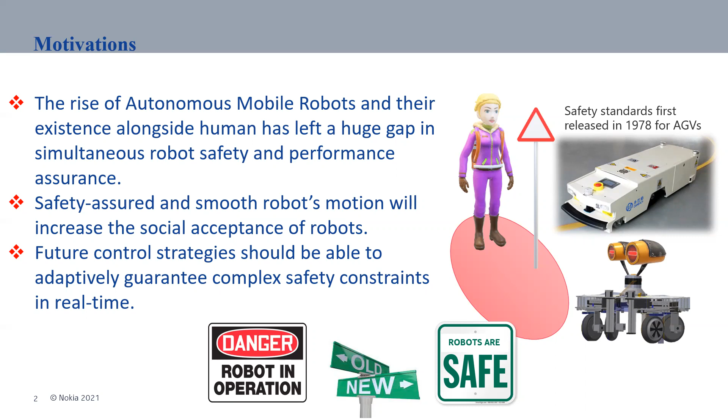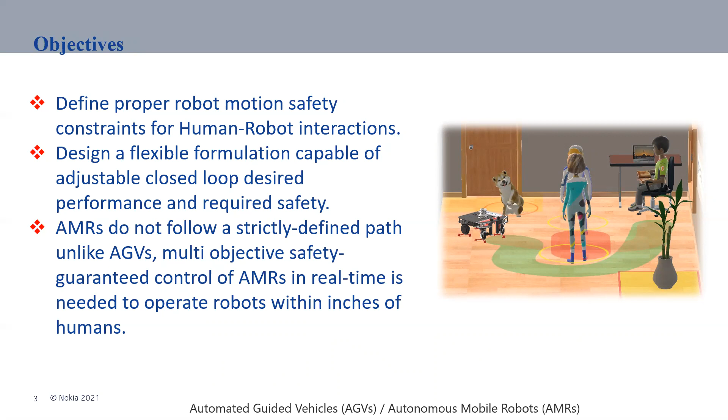The objectives of this work are: we define a proper robot motion safety constraint for human-robot interactions. We design a flexible formulation capable of adjustable desired performance and required safety. And we also discuss that autonomous mobile robots do not follow a strictly defined path unlike AGVs, and multi-objective safety-guaranteed control of autonomous mobile robots in real time is needed to operate robots within inches of humans.

So this is the strategy that we propose in this paper. Any autonomous mobile robot working in any given environment has multiple layers: the perception layer, control layer, and decision making and planning layer. The place where we can apply these safety constraints to the robot, which increases the safety of the robot more than any other layer, compared to the motion planning layer or the zone-based map, is the motion controller layer, which is in real time.

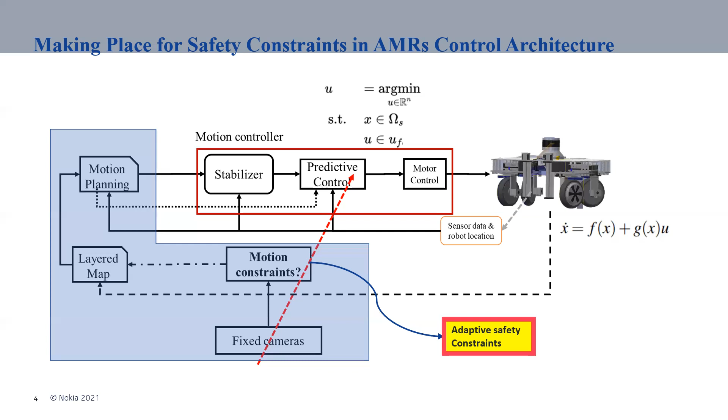Previously, it was just a 0 and 1 type of safety constraint, where the robot's motor would stop if there was a human in front of the robot. But a more advanced type of safety that can also guarantee the performance of the robot is a predictive controller, with which we can apply more complex constraints to the system. The robot's dynamics are complicated, we need to apply complex constraints to the motion of the robot, and the dynamics are also subject to input and state constraints. Model predictive control, or nonlinear model predictive control, is proven to apply very complex constraints in real time.

The safety constraints that we define for our human-centric control use the relative location and velocity of the human and robot in real time. The assumption here is that we are able to detect the human and robot's location, orientation, and speed within a given environment. The robot's goal is to reach the green point when there are humans in the middle of the way, and the robot shouldn't break the human line and shouldn't get too close to them. If the robot is close to a human, it should keep a safe velocity and acceleration. The overall safety set is the combination of all the safety sets for each individual.

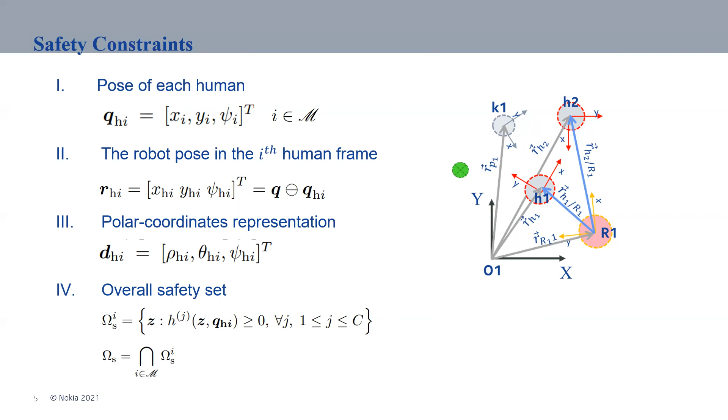The safety rules are defined in the table here. The robot going from a given point to a desired point shouldn't get inside the safety bubbles around the human. These safety bubbles are a smaller circle and a bigger circle. The bigger circle is to the front of the human, so the robot wouldn't break the human's line, and the smaller circle keeps the robot outside of the safety zone around the human. We call these keep distance from humans and yield to humans.

We also need to limit the speed near humans. If the robot is getting closer to a human, the speed of the robot should be adjusted to that distance. And the acceleration of the robot relative to the human should be acceptable, so that it wouldn't scare or cause fear around humans.

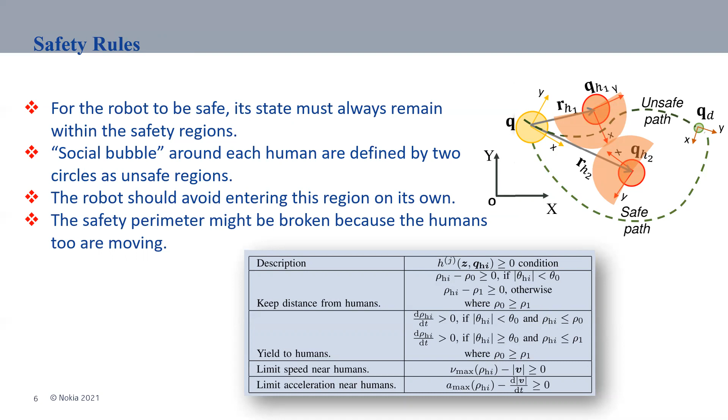And why did we choose a nonlinear model predictive controller? The reason we chose this controller is its strength in applying very complex constraints in real time. The objective of this controller is reducing the tracking error, or getting close to the target with the least amount of change in the input. So it means the input of the system should be very continuous.

And the derivative of that tracking error will also keep the motion of the robot smooth. We can adjust this objective and have a multi-objective optimization that can give us different solutions in future. And also we are able to apply safety constraints by adding this penalty function to our optimization cost function.

So this optimal control problem, unlike the traditional optimal control methods, is able to apply complex state and input constraints in real time. The optimization problem is subject to the dynamics of the robot. We know the uncertainty range in real time, and we want to keep the safety barrier functions inside the safe set that we define in the table.

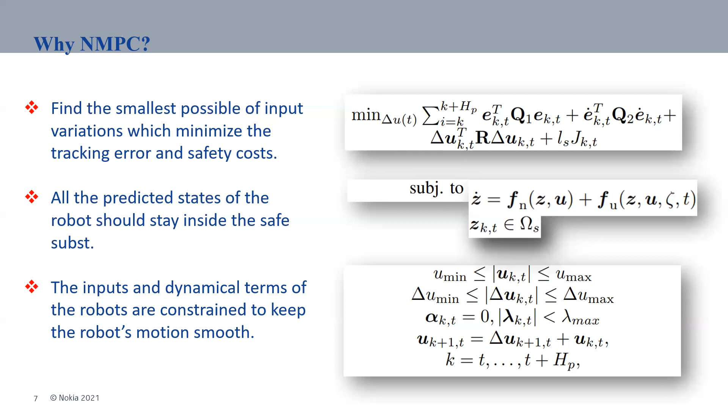And we are able to predict the future states of the robot by simulating the dynamics of the robot and the environment within the prediction horizon. So here is a demonstration of a four independent wheel type of robot. Each wheel is able to rotate independently. It can produce torques by the internal electric motors added to each wheel. The tire and road interaction is highly nonlinear. We are using the magic formula to model this tire-road interaction.

The kinematics of the robot contain uncertainties, and we added those uncertainties to our simulation. And the dynamics of the robot relate the tire forces to the acceleration of the robot. We also embedded the actuator model into our modeling as well, where the voltage of the motors will cause the torque and velocity of each wheel.

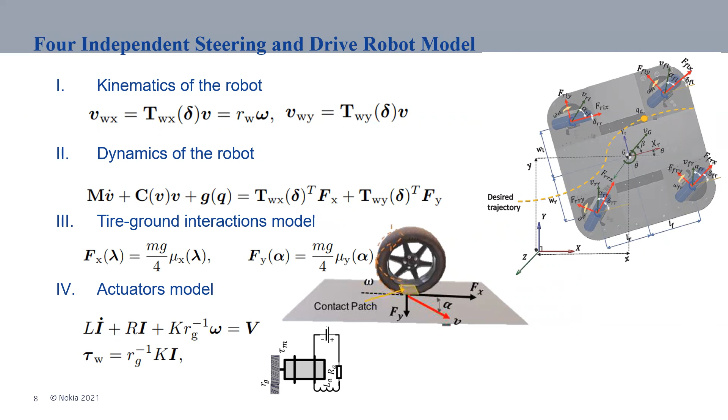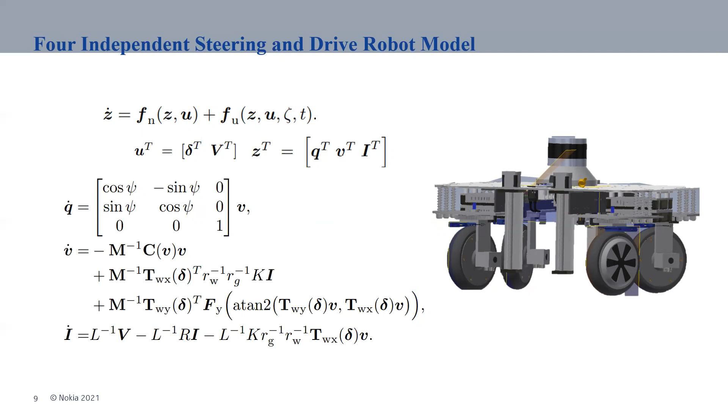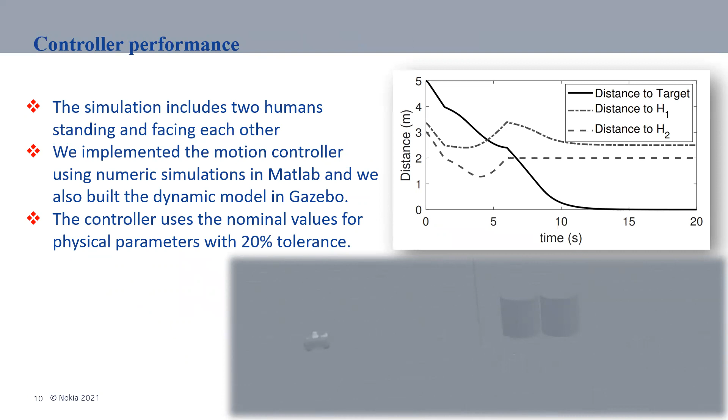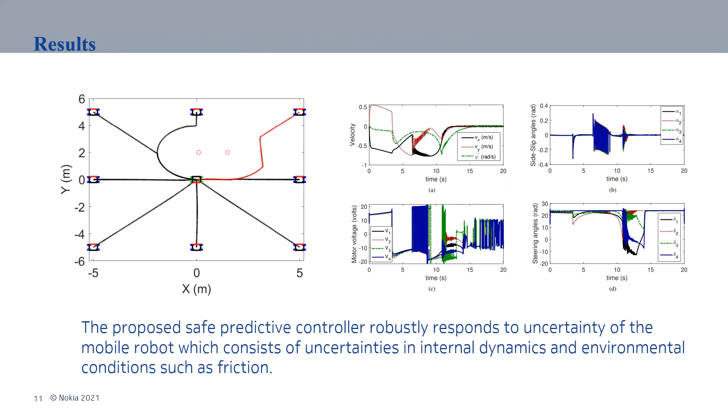And you can see in the figure on top, the robot will get to the target without getting close to humans. And here on the left, you can see the robot starts from different initial points, and it will not get close to humans when it reaches the target as smoothly and fast as possible. And on the right, you can see between time 7 to 9 there are some oscillations, which are caused by the external disturbances that we added to the voltage and sensor data.

And as a conclusion, this work demonstrates we are able to apply safety constraints for human-centric environments, and we can embed these safety constraints directly into the controller. The controller produces robust and efficient motion, and we are able to implement control barrier functions as safety constraints in our nonlinear model predictive controller. And we implemented and validated our work with simulations in MATLAB and Gazebo.

And in future, we will test these algorithms on real robots for more validation in more realistic environments, and want to integrate this work with motion planners and local planners.